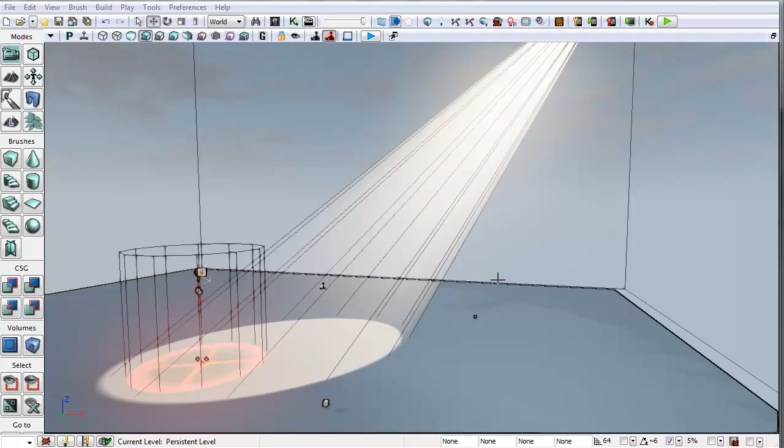Let me just show you what I got going on first before I show you how I did it. These are pretty cool.

Okay, you can see I basically got this spotlight that just kind of travels around in a circle, and that's a separate element from this other thing here, which is basically like a danger zone targeting thing that hits the ground, and when it times down it explodes. So boom, and you get a sound effect and a particle, and it does in fact kill you. So if I can make it in time, which I don't know if I can, there I go, I'm dead.

Okay, now the other thing that happens is if this spotlight sees you, it's going to give you a message that says you were caught, and now it is following me. You can see that it's basically on me no matter where I go. I'm moving around here, kind of hard to tell because I got a pretty blank map, but as I jump around and move around, it's pretty much stuck on me. And again, separate from that, it can kill me.

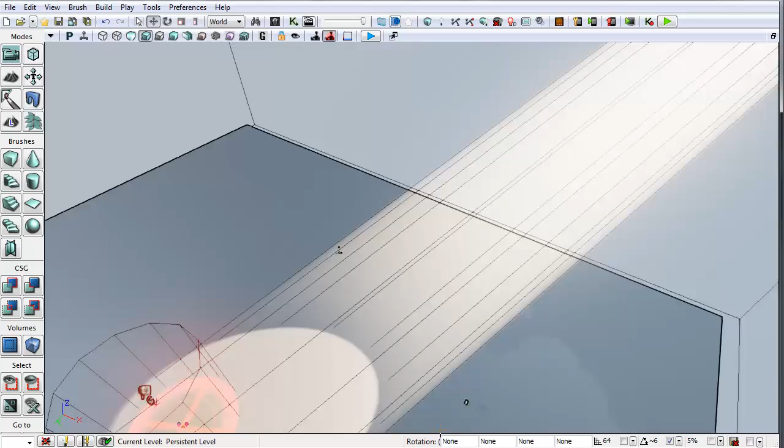So how did I do this? Pretty easy. Okay, first thing, for the spotlight to actually trigger on you, I've got three elements here.

I've got an actual spotlight, which is just pretty much set to reach pretty far. If I look at the light components here, the point light component radius is 6,000, so it goes pretty far. I think it is set to cast shadows, but it's not, it doesn't actually do it, so it doesn't really matter. Just turn that off, doesn't make any difference.

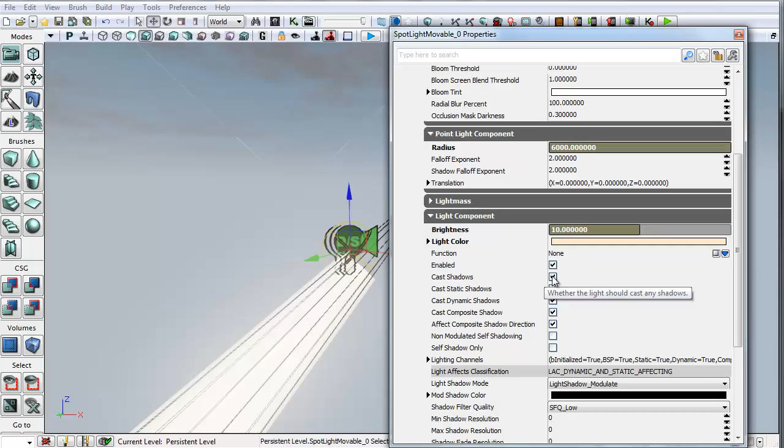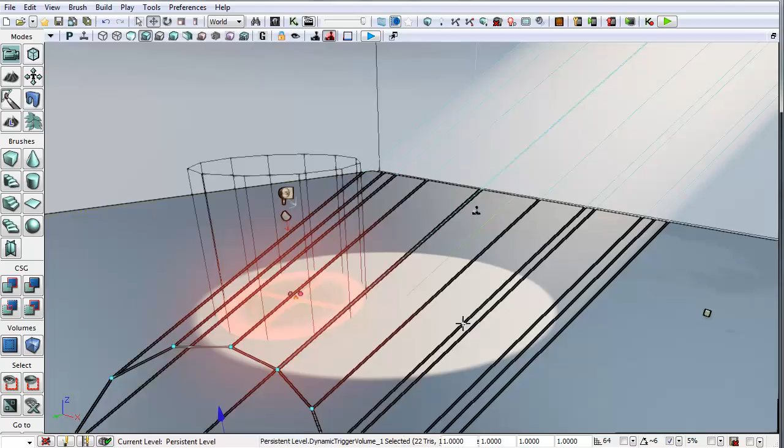Still casts. I've got a trigger volume, which is based off of a cone. Now you can make the cone right here in the brushes, so however big or wide you wanted it, you could just tune it. When I created it, I did it basically pointing straight down, so it was easy to line up. And then the other thing I've got is basically a static mesh.

If I hit Control B here, which will bring up my content browser with that item selected, it's just a static mesh cone here, real simple, obviously nothing spectacular or anything like that.

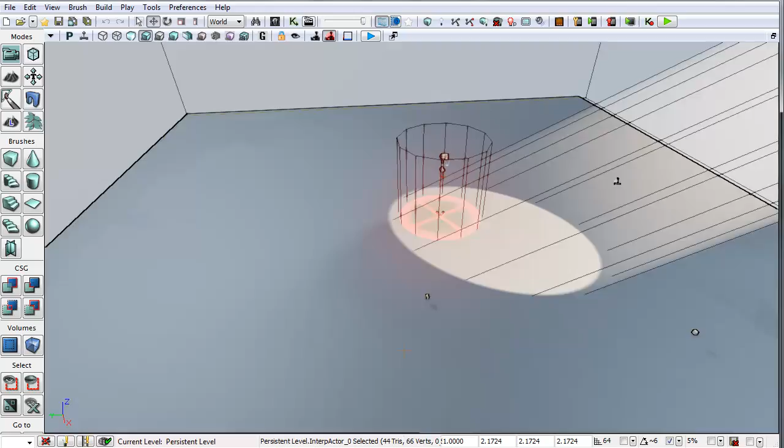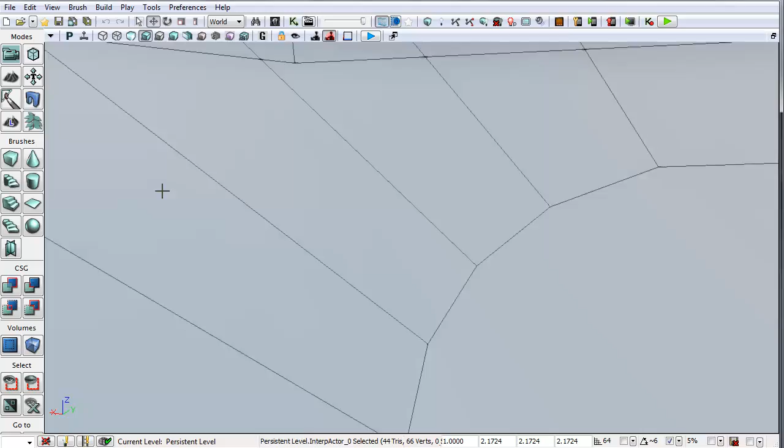But actually having the bottom face right here was a mistake. I really need to get it just kind of crunched down into nothing so that it doesn't have any ability to come into the transparency, because if you actually look at it, at some point you can see the back of it. You can see this hard edge right here. I don't know if that's actually it, but I think it's just not going to show up because of the way that it's blending, but you can see that face and it sucks.

So that's why I just moved it too far into the ground so you wouldn't see it. But I just need to fix the UVs. It's not a big deal, and it's kind of beside the point.

The other trick is not even a trick. Let me actually, I think a lot of that was off the screen, so let me shrink all this.

Texture coordinate mask with the G, 1 minus power of 5, multiplied by a hot value of 10, 8, and 6. Add those together through the opacity, set the emissive to just straight to the hot value. And I need to come over here and check.

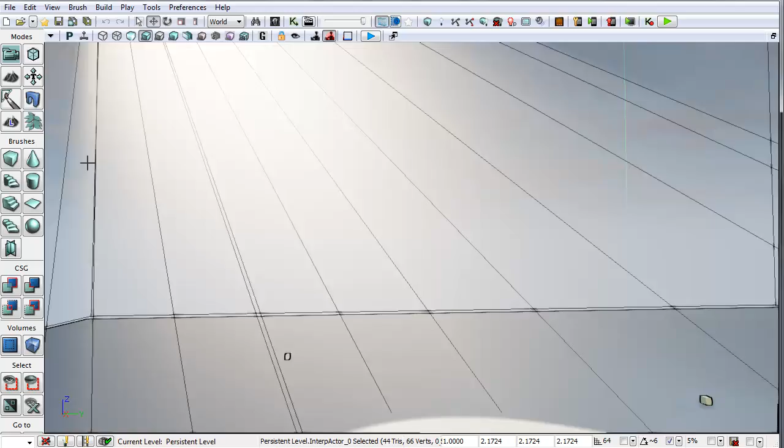Used with fog volumes, okay, that's the important thing. I don't really even need to check anything, but I'll do it anyway. And then what you have to do to get it to look like this, so that when you look into it, as you go into it, it's nice and bright. It's not edged or anything like that. It's nice and clean, looks like a volumetric effect. You could try to use some kind of material trick on it, but...

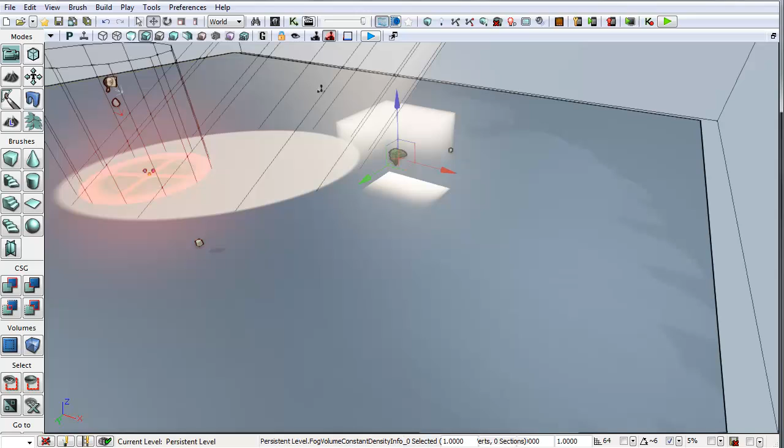A fog volume works nice. It is an interp actor with interpolation set to true, and what I've got in the world is this actor here, which is a fog volume constant density info. Now I moved it out of the way down below the ground, because if I set hidden here to true, it shouldn't be showing up, but it does anyway, so you have to hide it.

But pretty much all you do is, when you go to fog volume actors, lock this, pick whatever mesh you want to actually be the fog object, and you can put it right here. Then you can set your density, you can set the colors. I matched the colors here, 10, 8, and 6, but the material pretty much takes care of it. You also need to drag the material, your fog volume material, onto the object. Then you can set your density.

So if I go like 0.001, you see it gets much dimmer, like that. If I just do 1, it's going to be uber bright. So you got pretty good control here. I think I settled on 0.001, so it was pretty obvious that it was there.

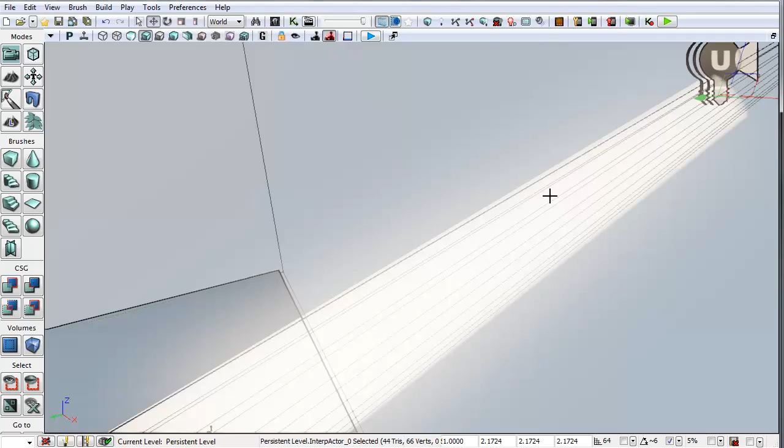So then what I've got is each one of these two things, the interp actor with the fog volume material on it, has an attachment of the spotlight, as does the trigger. Now the trigger is a dynamic trigger volume, created off of a cone brush, so dynamic trigger number 1. It's also attached to the spotlight movable, and its movement is set to interpolating, so it can move. So wherever the spotlight goes, the trigger is going to go, as will the mesh, and they're lined up so it looks right.

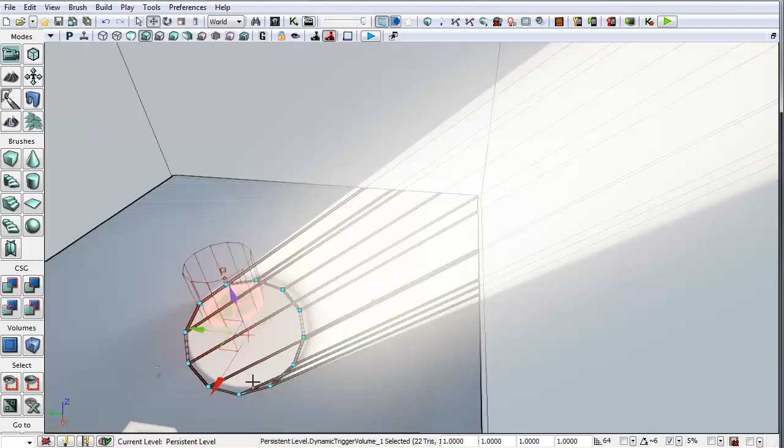Now what I've done is I've got these two actors here, which are just simple cubes. There's nothing to them. If I take these and unhide them, because I set them to hidden, let's move this guy back out of the way because it's annoying. You'll see the simple movement that I gave it. Very, very simple, I didn't do anything to it.

You can see that this object is just spinning around in a circle with Matinee. This object being attached to it is going around it like that. It'll keep going, as you can see, but the spotlight is now fixated on me and no longer on that object. So the Kismet for that is simple.

It's right here. You need a Matinee sequence. So what I do is, the first thing on level loaded, I tell this thing to spin around in a circle. This Kismet tells this to spin around in a circle. So all I did, let me show this here.

If you go here and click the movement track, you can come down here and say show rotation on the curve editor, and it's the last 3, so it's XYZ for translation, then XYZ for rotation. So just in the Z here, you can see I've got a value at 5 seconds of 360. If I set the value, it's 360.

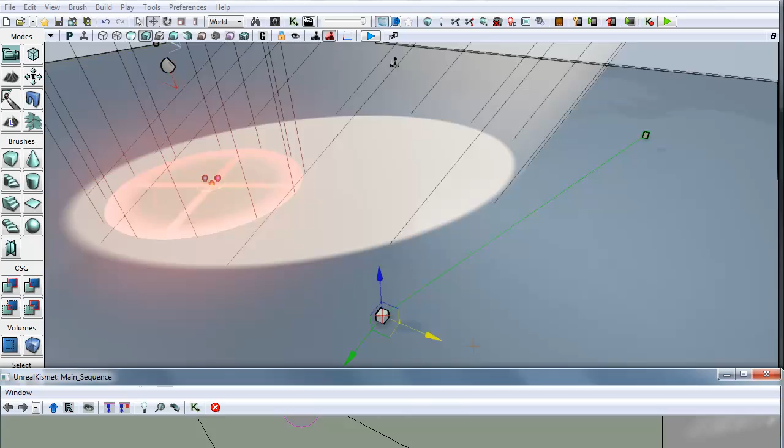You can do more dynamic movement, a little more wavy, by moving this in and out with its own matinee while it's attached. So the spotlight will go in and out—we could do like a spirograph kind of thing. Anything you want for the animation, it doesn't make a difference.

All I've got is a simple dynamic trigger volume touch that fires the 'caught you' message. It just says caught you, and then it immediately stops the matinee for the target, the spotlight going there, and 0.01 seconds later it plays another matinee, which is the exact same thing—I just copied it and replaced the target with the player, and that's it.

That's all it takes. So now when I go in here, it's going to follow that object, and as soon as I get into that trigger volume, it will stop the look-at for that object and turn the look-at on for me. Now I could run a timer that has it go back to the other object—let's try that so you can see how this works.

I'm going to set this—let's see, I could do it with my timer, or control it here. This is set to 5 seconds, right? So let's take off looping, and when it's completed, we'll just replay this. So it'll stick on you for 5 seconds, and then should go back and play the other one, following that other object.

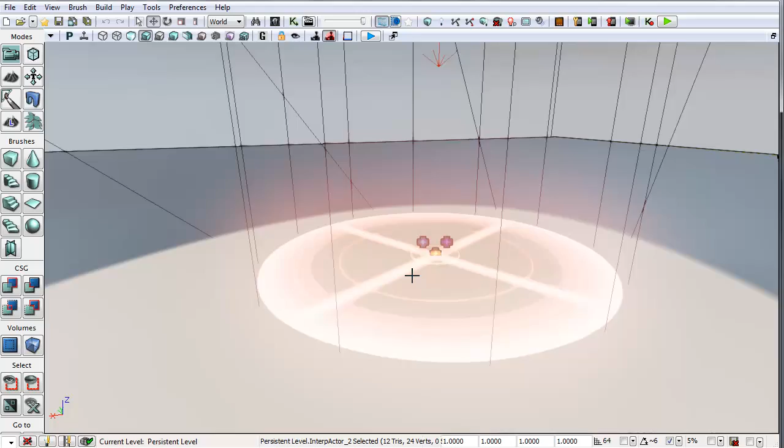I'm not going to show you guys how I did the flash, but basically it's just a progress bar that, instead of scaling horizontally or diagonally or vertically, scales for a circle from the inside out. In the flash, when it gets to the bottom, it just triggers an event called fire.

This sequence is a little long, but it's pretty simple. You can see I've got bomb enabled, decal location, FX location. Let me change the color of this here.

Just make it blue. And let's just make it white. Okay, so let's get in here.

So on level loaded, we start. The delay is just a 1 second delay, and it's going to say that the bomb is enabled.

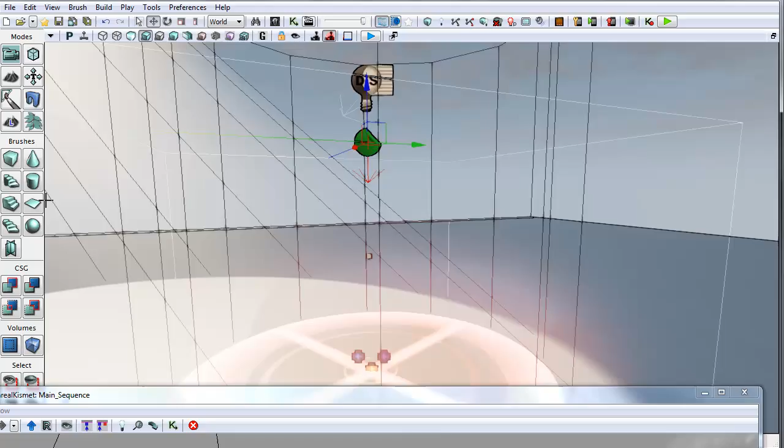What it's going to do is get location and rotation of this decal actor. Now the decal actor is here. The decal has a material that's using a render texture target that's piped to the flash.

So what you can see is over here, when I actually get to the part where I open the movie, in this segment here I have it told to pick that render texture target, which is here. So if I just click on here, you can see I got my SWF, I got my material, and I've got my target. And the material simply has a sine wave on it to give it a little bit of a pulse.

Alright, and I made it glow like hell. I just multiplied it by 500 so it's bright as poop, which poop's not very bright, and if it is, then you got problems. And that's really all that's in this package. I got the cone and the fog material, and then I got the SWF, and this is completely separate from this, but this is all I needed for this.

So that's where I open the movie. But the first thing I do is I get the actor location, and I pipe it to a vector variable. You can just right click here and say new vector variable.

And then what I do is I do get vector components. That is here, new action math, get vector components. And what it'll do is take whatever vector you pipe into it, and it will split it out into its XYZ. Very handy. And then what I do, I name these X, Y, and Z.

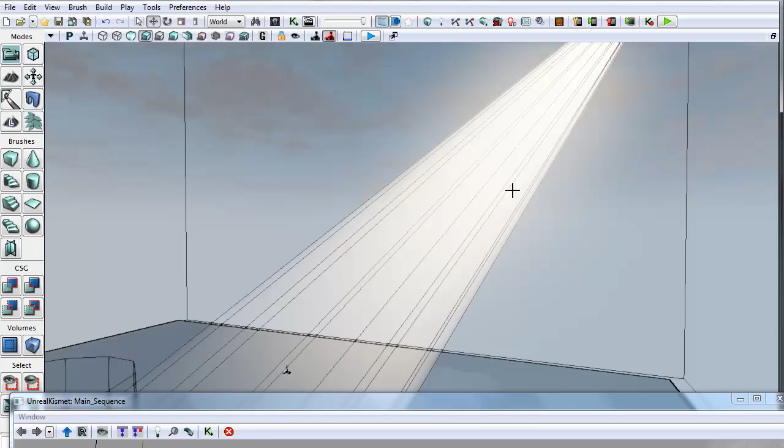Then I do a delay. I set the Z to be 0 after that because, as you can see, I've got a particle emitter here. I've also got a mesh. I had issues controlling the mesh. Let's hide these things real quick so it's not so bright. Okay, so I got particle emitter.

So you can see that this is FX here, and this is FX location. Now FX location is this variable here, okay? So what I do is set the variable, because here's the thing.

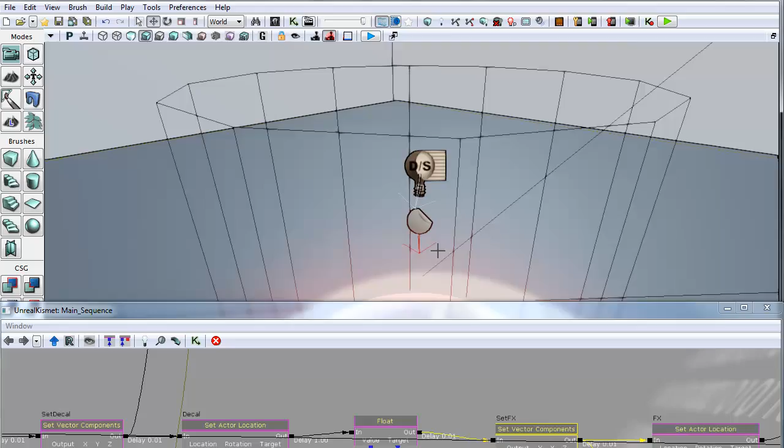This was kind of the trick. The decal is raised up, but the particles are down. So I don't want to keep messing with grabbing too many locations that are all over the place. So I can basically just do a new set here.

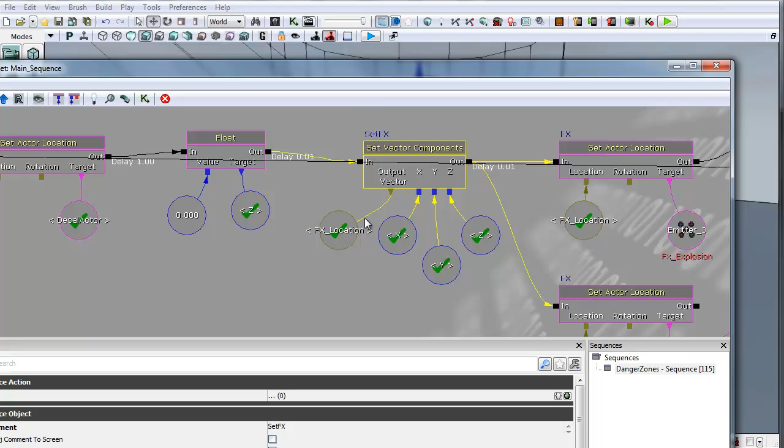So after I set this and set the actor location for the decal actor, piped to this variable, this is at a Z of 290. Then I set Z to 0 right after that. I put a delay on it of 1 full second, and then I set the vector components again. Because remember, I just replaced the Z. Now I set it again.

And you notice I have two different variables here. It wouldn't have made a difference if I'd made this decal location, because I would have replaced the Z. And then I set the actor location of the FX and of an actor sound, ambient sound movable object, which is somewhere in here.

There's a sound actor I got, yeah, it's right here. I hit it. Okay, so all this is an ambient sound movable, and you can find that in your content browser under actor classes. You just type in sound, and it will be ambient sound movable. Add that to your scene and make sure its movement is, actually it should be interpolating, but I don't think it really matters. Set that to interpolating.

So I set both of these, one right after, basically at the same time. So I set the FX and I set the ambient, and these are in the exact same position as the decal, except the Z is at 0, so that they're right on the ground.

Now if your ground is like a terrain or something, and it's real wavy, and you wanted it to be truly dynamic, you'd probably have to fire a vertical trace, get the distance, and subtract that from the distance of the decal to make sure these are exactly on the ground.

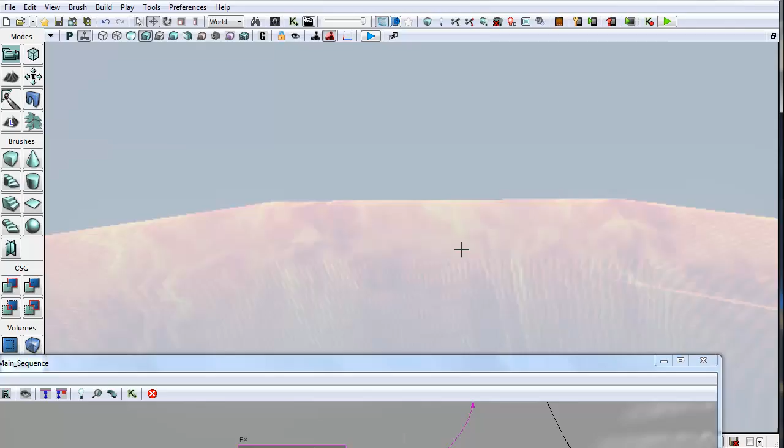Let's go Control B, grab this, grab that, grab this. The texture is actually here.

Now if I show this texture, if I pop this open, all I did was just put on various channels. Like on the red channel, I got a clean circle. You see there's no polygon faceting angles here because it's a Photoshop thing.

Then I gave it like a wave thing so I could use that for like a bump offset distortion, and then just a fire texture that I found on the internet, and there is no actual alpha channel. But this could have been just a simple cloud render. This could have been anything. All I did was filter, render clouds, then difference clouds, then a wave on it, and then a polar coordinates. That's it. That's how I made that.

So that's that, that's just the materials for that. Now the actual... see, I keep losing where I'm at.

I have parameters on here, just alpha. It's a default value, really high, doesn't really make a difference. So I have an alpha channel, a parameter for the alpha channel, and I believe I have a parameter for the brightness too, so I can make it really bright. It's set to 10, so it's pretty hot. And it all goes into the emissive, okay?

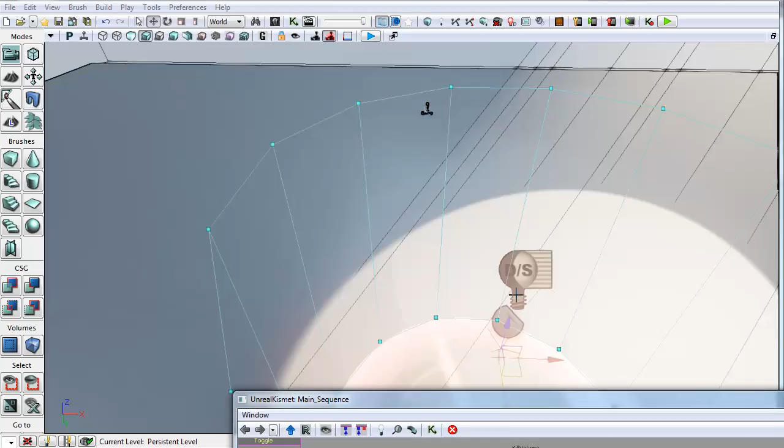So pretty much at the same moment that it sets the decal, it sets the dynamic trigger volume, which has its pivot right there. So it actually ends up going at the height of the decal, but it still connects with you because it's not set to be force overlap. So it still works.

These things were basically fail tests. I tried to see if you could have a volume that was off, and if you went into it and then it turned on while you were in it - like enabled itself while you were in it - if it would trigger, and it doesn't. Keep that in mind: you have to actually pass into it, it can't just appear on you, or it can't just activate on you. It can appear on you and work, but it won't turn on while you're in it and work.

So as long as it's on when it moves to you by any method - any of basically the three methods available to us: there's Matinee to actually move it around, there's set its location here, and then there's teleport, where you can teleport it to the location of something else - as long as it's on when it comes to you, it will still work.

But if it's off and you go in it, okay, I already explained that. So what happens is when you touch it, you can see that is damage enabled. So when you go into this volume, it says it's true, and when you leave the volume, it's false. Now what it does is it checks after you touch it: is the bomb enabled?

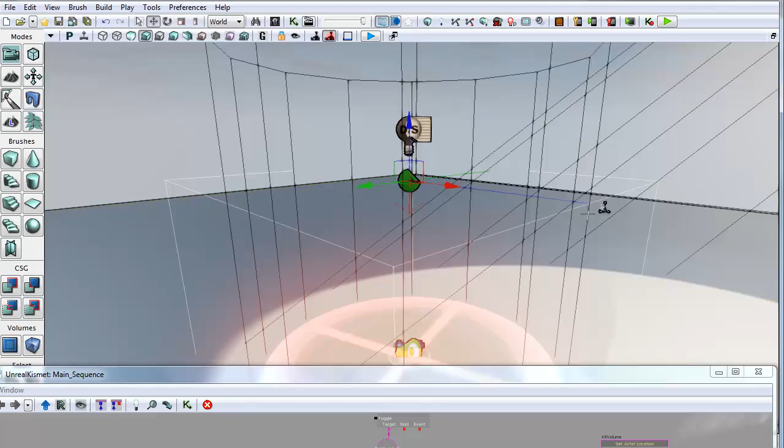Again, I randomly move the decal. Once I'm done with that, I get all of its stuff. I could have skipped all of this and said teleport, but I wanted to make sure that the heights and things were in the same general ratio - that the decal was raised, and that the effects and sounds were on the ground.

So I made sure of that, and that's why I did it this way instead of just teleporting everything to the decal actor location, because it would put everything at the ground or floating up in the air. The explosion would have started in the air, and the sound effect would be high up, and I didn't want that. I could have teleported it and then moved it down, but I'd still have to get its position, split its vector, and subtract however high it was, and all that stuff.

So after that, we get all the positions, and then we do our editing math, and then we set them all. Once that's all done, we open the movie, and we unhide the decals so that the movie can play, and we fire the actual flash function to get it to do its little animation thing.

Then the flash takes over, and when the flash gets to its moment of glory, it hits the - remember you've got to pipe in the movie here - it says fire.

Now here's a problem: if I have multiples of these all over the place, I've got to be really specific. Each one would have to set a certain thing, because if you have multiple copies of a flash and each one fires a remote event, they all will fire the same remote events, unless you were to tell Flash that it's a different event - so you could have variables here.

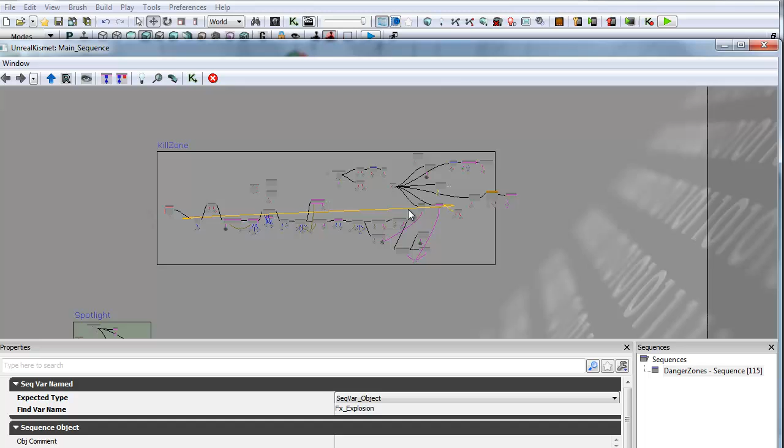I just finished this, just figured this out, and it came out to be quite simple, and I'm really happy about this Look-at group, target stuff, and using Look-at group here, being able to just add a group here and pipe in an object to it, because it works for literally anything.

Here, watch, I'll show you that one last time. Let's just pick a mesh. Let's go all assets and static meshes, and let's take this 747.

Now you can see that this is backwards in the X. You see that, how the tail is going down the X? So the tail is what's going to be looking at me. But I'll add it, I'll add it as an interactor.

Okay, so you can see here's this aeroplane. And what I'll do is I'll just make a dupe of this. Boom, here, everything's the same. And I'll hit play on it and play rate, and all I gotta do is punch that into here.

And it should work. I think it might need to be interpolating. Yeah, look, no, it's not working. Hang on. Is its movement set to interpolating? It is. What is it set to look at? Should be the player. Oh, I gotta make sure that doesn't get played. Let's just uncheck some of this other stuff.

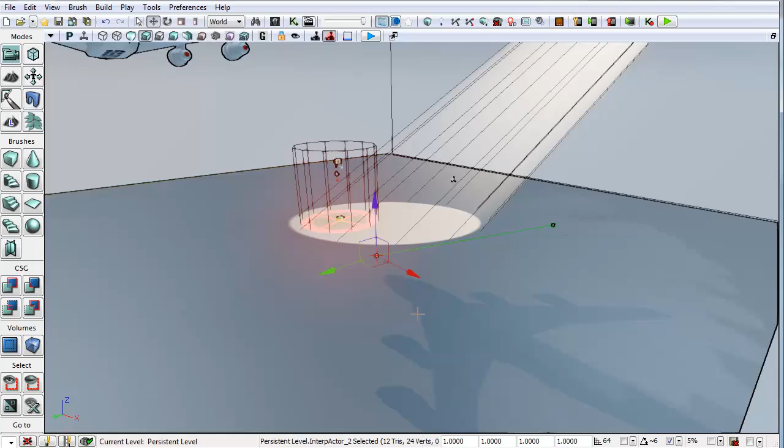Now if I take this object here and punch that in here, notice that I can't actually assign that. See how it doesn't work? I was like, oh crap, you can only do it to the player. That's garbage. No, you just gotta add a new variable and pump it to that.

And now you'll see that it's gonna follow that object. But that object's not spinning. It did look at it though. This is the one that spins it around. See?

So yeah, that's it, you know, and it's very cool. And again, you can definitely use this on lights and dynamic triggers and stuff like that to get spotlights that trigger stuff, which is kind of a staple.

And if I stand right here when this goes off, caught you. Oh wait, I gotta move. I'm not gonna move, I'm gonna die.